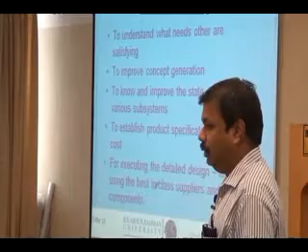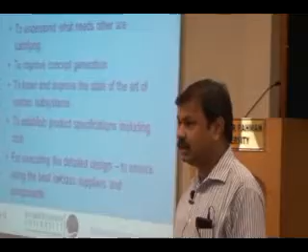Then, to establish product specifications including cost. I told you the ultimate end result of the benchmarking is to arrive at the product specifications including the cost. Generally product specifications don't include cost, but when you arrive at some targets for you, no target is meaningful without a cost attached to it. So you have to correct the cost also at the end of product benchmarking.

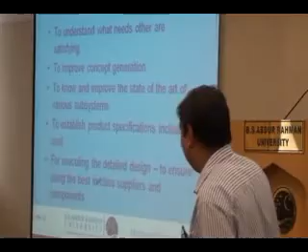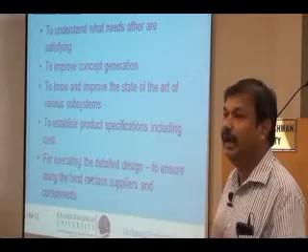For executing a detailed design, there is another important decision that you have to make: vendor identification, or rather, it is nowadays called vendor management.

See, for any product, only about 10% of that is manufactured inside the factory. A few years back, I took a group of students in mechanical engineering to Ford. This happened because the situation has changed substantially now, but this happened some 5 years back. We took a group of students to Ford India. The students were very disappointed because Ford India didn't have any CNC machine.

They came and complained to me, sir, we have only one CNC machine in our college, but how come Ford doesn't have any CNC machine? They don't have any CNC machine.

It has changed now. Now they have opened a new plant called the engine plant here, which uses tens of CNC machines, if not hundreds. But at that time, they didn't have an engine division, so they didn't have any CNC machine.

See, all the components used in an automobile are outsourced, manufactured elsewhere. They are brought to Ford India and then just assembled together here. All the remaining parts are manufactured elsewhere, taken in, and then assembled at the factory here.

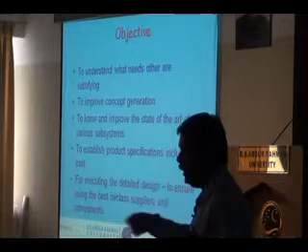So one important issue in the design is vendor management - how you are going to manage your vendors. I have to decide for each subsystem or each product from whom I am going to buy, and then outsource that particular operation to that particular vendor.

Now competitive benchmarking will help you identify a suitable vendor for some of the subsystems and components you are going to design. If it is an automobile, suppose a fuel injection pump or a carburetor - you will not be designing it, and you will not be manufacturing it either.

Many times you will not even be designing a fuel injection pump. You will only say, these are all the outputs I want from a fuel injection pump. So that will be done by a specialist company, for example Bosch, which manufactures the carburetors and fuel injection pump and delivers it to you.

Suppose you have various indicators in your automobile - the fuel level indicator, the speedometer. All these indicators are not manufactured by the OEMs for all automobiles. Ford doesn't manufacture these indicators. Maruti doesn't manufacture these indicators.

There is a company in Coimbatore and many more, called Pricol. Pricol is a specialist in manufacturing various indicators, be it a speedometer, a fuel level indicator, or an engine speed indicator. The various dial indicators are manufactured by Pricol.

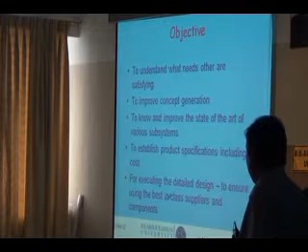So while doing this benchmarking, we can identify who are all the manufacturers of indicators, who is using the state-of-the-art technology. I will just call him and give him my requirements so he will design and manufacture the indicators for my product. That is another advantage of performing competitive benchmarking - in executing the product detailed design, I will be sure I am using the best-in-class suppliers and components.

What do you mean by best-in-class? In manufacturing indicators, who is the best? I can employ him and have indicators designed and manufactured by him. In manufacturing fuel injection pumps or carburetors, who is the best? I can deploy him. In manufacturing fasteners - various bolts and nuts -

in an automobile you will have thousands of bolts and nuts being used. In manufacturing all these fasteners, who is the best? So I can leave the design and manufacturing of the fastener to them, so that my overall responsibility is reduced. These are the objectives of doing competitive benchmarking.

Now the story of competitive benchmarking - officially, many people would have done it for years, but as a systematic, scientific method, it was first employed by Xerox Corporation.

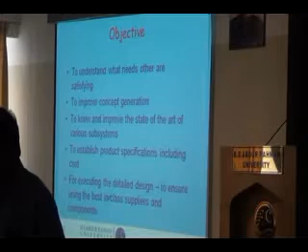Please believe me, Xerox - what do you do to your book? Photocopy. Xerox is the company which developed the photocopying machine. Now the company is so successful, we use the name of the company for describing the action itself.

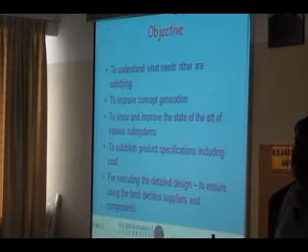But please believe me, today Xerox is not the number one manufacturer of photocopying machines. They lost their superiority long back, to Canon. Of course, they have regained some of their lost charm. But originally in the 70s, what was the technology before photocopying? Does anybody know what we were doing before the advent of the Xeroxing machine, the photocopying machine?

Typewriting with multiple carbon papers - there is always a limitation. I have seen typists will not generate more than 3 copies because they have to press really hard. They have to really type hard, then only the 4th copy and the 5th copy will get the ink.

For engineering drawing, what will you do? For drawings and other things - tracing? No, it is not tracing. The drawings themselves are made on a kind of tracing paper. It is not actually tracing paper, it is called a vellum, a transparent paper. The drawings themselves were made on this transparent paper called vellum.

Then they will take a blueprint of it. Using ammonia, they have a way of taking multiple copies, so you will get a blueprint. The color produced on the ammonia coated sheet will be blue in color, and that is why all the drawings are called blueprints.

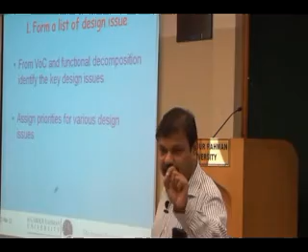Now, you can assign priorities for various design issues. You can give a number. This is the topmost issue that needs to be addressed. You can assign various priorities for the design issues that will help you plan better.

So, from the voice of the customer, you identify what are all the basic issues that I should look into. What are all the basic problems, what are all the basic requirements I should look into in the various products.

Next. Now, who am I going to look at? With whom am I going to compare? You have to always compare with a major player in the market.

So, you have to identify first who are all the competitors and what are all their models. And you have to study their market share.

You don't want to compare with the loser, is it not? Nobody wants to get identified with the loser. So already there may be a few losers in the market. You don't want to, in a positive sense, compare with them. Probably you would like to study their failures and then learn from their failures, but not in a positive sense.

So you identify their market share and find out, okay, with whom you would like to compare.

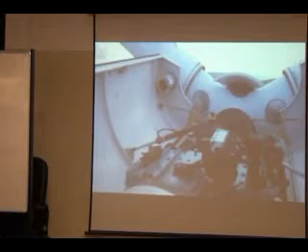In this nacelle we have the generator, often a gearbox, and occasionally a high voltage transformer. The whole thing sits on top of the tower, which is supposed to be there to keep the blades from digging a hole. We tend to class turbines by their power output.

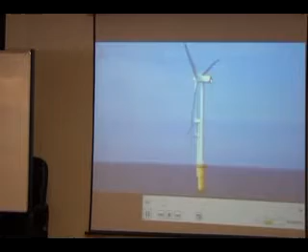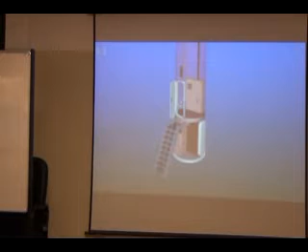The generator at the top of the turbine is producing about 690 volts, and this transformer converts that into several thousand volts to send it more efficiently to the substation.

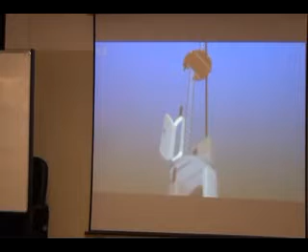The main entrance to the turbine is at first floor level, and there we find the control cabinet and the base of a ladder, or a series of ladders. Often in these smaller turbines, the ladders run to a series of platforms and they change sides at each platform.

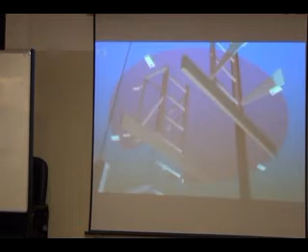To give you a rest area and a bit of fall protection, platforms are generally just wooden discs suspended inside the tower walls, and they might have a trapdoor or a set of guardrails and a gate depending on how the ladders are arranged.

The main run of cables goes up the wall of the tower, dodging past any intermediate junctions, because obviously the towers can't be delivered in a single 40-metre long section. They come in 20-metre long sections that are bolted together with a lot of nuts and bolts.

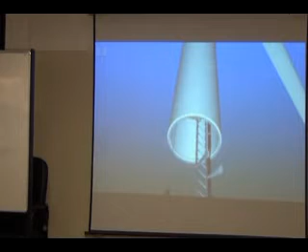But as we move higher and higher through the platforms, they're getting slowly narrower and narrower, the ladders are getting a little bit closer together, but eventually the main cables stop being attached to the wall and they hang freely in the centre of the tower so they can twist.

As the nacelle rotates to face the wind, if they twist too many times, the nacelle will spin itself around to remove the twist. But as we move up, the cable goes through a hole in the centre of each platform, and at the top of the tower we have a steel platform with a sealed trapdoor, which we call the yaw platform.

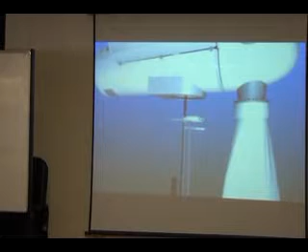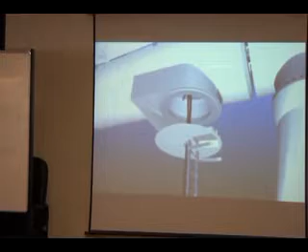Just above that we have the yaw ring with the bearings that allow the nacelle and the rotors to rotate around to face the wind. This sealed platform acts as a bit of fire protection, and also avoids people falling back down the tower, because at the bottom of the nacelle we simply have a hole which we climb. The nacelle in this case is a slightly tapered tube.

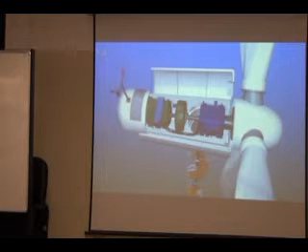At the back we have the wind sensors which give us speed and direction and allow the turbine to face into the wind and to change the angle of the blades. The nacelle itself is just a fiberglass tube. At the front we have a similar fiberglass cowl protecting the hub, which is a steel casting on which we have bolted our 3 blades, and the blades can turn or pitch so that the angle they form with the wind can be varied.

Out of the back of the hub we have a shaft which leads into the gearbox, then a high-speed shaft through a brake into a generator, and that generator then supplies the electrical power, at about 690 volts, all the way back down the tower to the base.

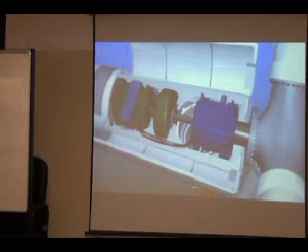And right at the back we have a cooling fan, as we're generating 500,000 watts of energy inside the nacelle. Some of that is wasted heat, and without an efficient cooling system there is the potential for the turbine to catch fire. Now, the layout of a larger turbine is broadly similar, but some of the components are in different places. So let's start by looking at the tower section of a typical 2 megawatt turbine.

Where we place the high voltage transformers in multi-megawatt turbines is a lot more variable. Quite frankly, we have a lot more room, so they can be in the nacelle, at the base of the tower, on platform 1 in the basement, or outside in a hut. In this example, the transformer's at the top, so when we go into our door, the one thing we'll not find is a transformer.

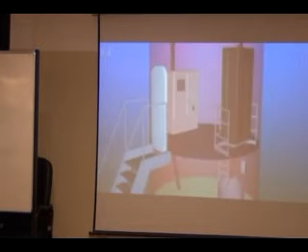We do have the high voltage switches, in this case on platform 2, but on the entrance platform we have the usual control cabinet and a lift, a little green box. That lift will take 2 people to the top of the tower, or nearly to the top, without them having to climb the single, very, very long ladder.

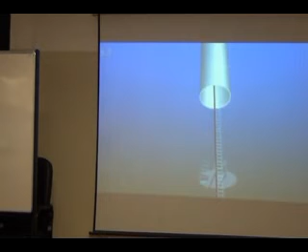Almost all large turbines will just have a single run of ladder for the majority of the run of the tower. It will have a wire or rail system fall arrest device fitted to it, but it is still a long slog of the ladder, which is one of the reasons why service lifts are so important. And again, the tower's in sections so that it can be delivered around the country without demolishing villages.

Sometimes, if we're running a long distance and we haven't got room for a proper platform, we can put a half moon in place. No fall protection on the platform, but we assume you will keep your lanyards connected at this point because it's quite a long way down.

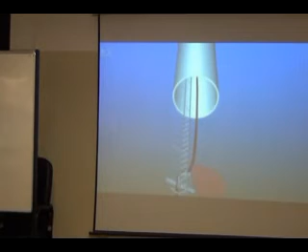The cable again breaks free from its mounting and hangs in the centre of the tower for the last 10-20 metres or so, so that it can rotate as the nacelle yaws into the wind. And the lift eventually runs out of space. Remember, the tower is getting narrower and narrower as we get to the top. So the lift tends to park itself about half a platform from the top, and we have a normal ladder which then leads to the yaw platform, and then it starts looking very much like the smaller turbine did.

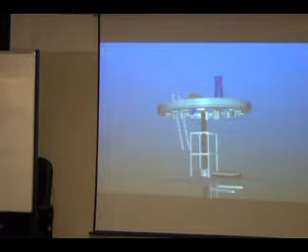We have a yaw ring bolted to the underside of the nacelle, joining it to the top of the tower. A series of disc brakes run around that yaw ring to lock it in position when the wind isn't changing direction. And when it is, we have a series of either electric or hydraulic motors that rotate the entire mechanism around on the top of the tower.

The layout of a multi-megawatt nacelle is again more variable than for a smaller version. We always have to have a generator, but we may not have to have a transformer. In a few cases, such as the famous Enercon-shaped nacelle, we don't even need a gearbox. They're direct drive. We just have a shaft linking to a motor, and then lots of extremely complicated electronics to condition that power connection to the grid. But in most cases we need, the same as we need in the small turbine, gearbox, generator, possibly a transformer, all in a fiberglass box.

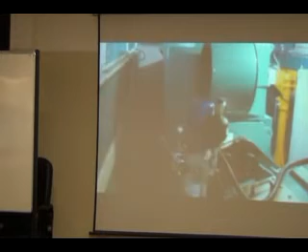In our example, we're looking at a typical design used by a number of manufacturers, with a nacelle that's 3 metres high, 2.5 metres wide, 7 or 8 metres long. It's a fiberglass box about the size of a shipping container. As before, we have our wind sensors on the roof, as far away as possible from the dirty air cast off by the blades as they spin round. This design is just a fiberglass box with a flat roof, and we access the roof through a couple of skylights.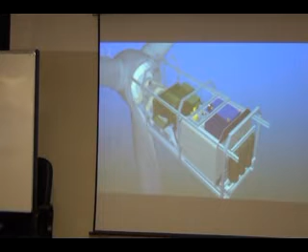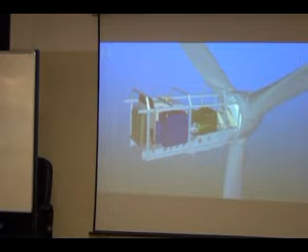Some designs are like before, a big cylinder with 2 opening doors. Some have an entire roof section which opens, rather like an old camper van. If we take the skin off the box, inside we have the same kind of components we had before, just bigger, with a bit more room, so it's laid out a bit differently. The only additional component up here is those 3 green cylinders at the back - that's our high voltage transformer, which used to be at the base of the tower. We've removed a lot of the control systems and hydraulic systems that would just clutter up the picture, and added in a bloke for scale, but most of the big components are still here.

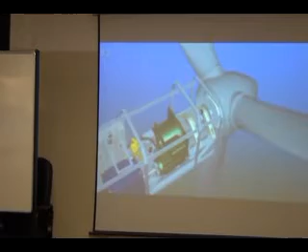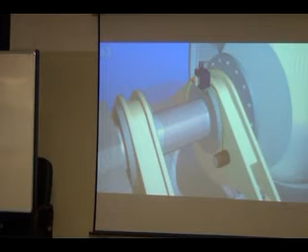If we look at the very front of the nacelle, we have a couple of bearings which support the main shaft, a hollow tube 50, 60, 70 centimetres in diameter. It's hollow so we can get electrical cables through this main shaft into the hub to drive all the control systems inside. We have a couple of pins on the first bearing that lock the main rotor in position when you need to access the hub. It's a safety feature - if you're in there and it starts rotating, it gets scary.

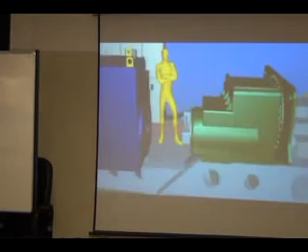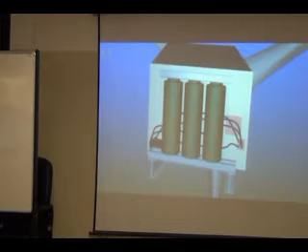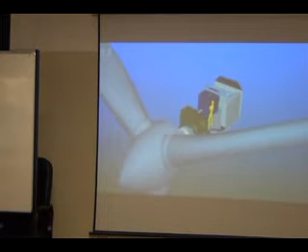And that, as an overview, is pretty much all there is to it. The only thing left to talk about are the blades, obviously, to actually do the work. We still have 3 of them, and they still pitch - in other words, they twist on themselves to line up with the wind.

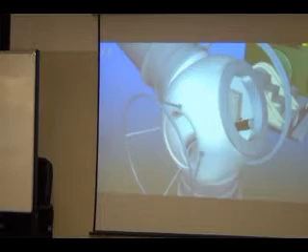You access the hub through the gap between this fiberglass cowl and the cast hub. It's a bit of a wriggle, but you wriggle through, usually feet first, crawl through the hole in the middle of the hub, and inside we'll find the control electronics, the pumps, the motors, the batteries, to control the pitch of each blade, rotating it on its own bearing to set the optimum angle for the wind.

We turn the blades through 90 degrees so they're edge onto the wind. There's no net turning force - it's a process called feathering, and the turbine will stop.

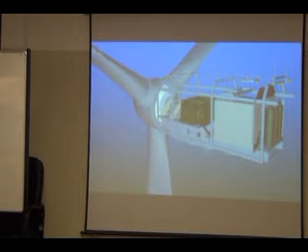Obviously there is a vast amount more going on inside a turbine - lots of wiring and control systems, lights and sensors, fire extinguishers, etc. But that is basically it, the general overview of most turbines found on wind farms today. Designs for the future will be significantly different, but at the moment it's a windmill on a stick.

Now, there are 2 major players in wind turbine manufacturing. Can somebody tell any names?

Vestas, then Suzlon. Okay, there are a couple of other Indian companies also. Any others? And many Indian players have been absorbed by multinationals. NEPC is one such case - they don't exist anymore. Good, good that you said it.

There are a couple of small players also, even today in India. Now I have taken the case of...

Can I go to the PowerPoint presentation? The last one, before that. Okay, now this is Vestas.com, which gives you the website of Vestas, and Suzlon.com gives you the website of Suzlon.

I have taken approximately the technical brochures of 2 megawatt turbines. These technical brochures are available as PDF files in that folder. There are 2 PDF files - these are the technical brochures. You should know how to read a technical brochure also; that is also part of this course.

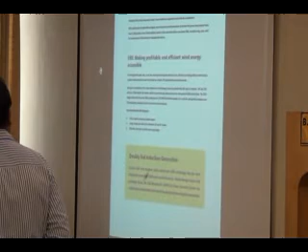So this is the Suzlon 2.1 megawatt. Can you go to the next page, please? Yes, so it completely describes the group, about the company. Next page.

Okay, these are general corporate informations. Next. Here starts the technical details.

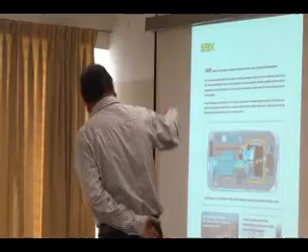Okay, there are many issues associated in a wind turbine. So the technical details are given. The overall design details are given. Next, technical. This is a very important graph for any wind turbine.

See, typically when the wind velocity is below a certain level, all the wind turbines must stop. Typically, when the wind velocity is less than 3.5 meters per second, this is called the cutoff wind speed. If the wind velocity is less than 3.5 meters per second, it is not worth generating the power.

The wind energy available itself is so small, it is not worth generating the power. You will be spending more power rather than generating power. So the system must cut off. There is no point in rotating, because when it rotates, something will wear, there will be wear and tear taking place, there will be associated problems.

So the windmill will no more resist the wind, it will align itself with the direction of the wind. By pitching the blades, you will align the blades in such a way that it doesn't resist the wind blow.

Okay, now after that, as the wind speed increases, today also the Chief Minister has started, she had mentioned that by June, July, the power problem in Chennai and Tamil Nadu may slowly come back to normalcy. The primary dependence, do you know anything?

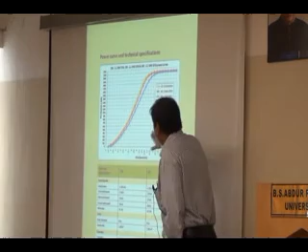So this may happen sometime in April end. And after about 12 meters per second, it generates the rated power. So this is the region which produces the maximum power in any windmill. Every windmill will have a typical characteristic. This is one important technical parameter to compare.

Now I leave it to you. You perform, in not more than 2 pages, a competitive benchmarking of any 2 windmills of your choice. They must be comparable. There is no point in comparing an 8 megawatt windmill with a 750 kilowatt windmill. No, they should be of comparable ratings. They must be, and you have to perform a competitive benchmark.

Try to get maximum information possible in what is submitted. No more than 2 pages, but let the 2 pages be rich. Is it okay? I'm not biased for either Suzlon or Vestas. You can choose any 2, I have just suggested 2.

You can choose any 2 windmills, preferably, because nowadays the industrial trend is - I don't know whether you must know this also - the technological demonstration for 8 megawatt windmills have taken place. These huge megawatt windmills are basically offshore structures. People have stopped constructing windmills on the land. Now they have gone to offshore structures in the sea.